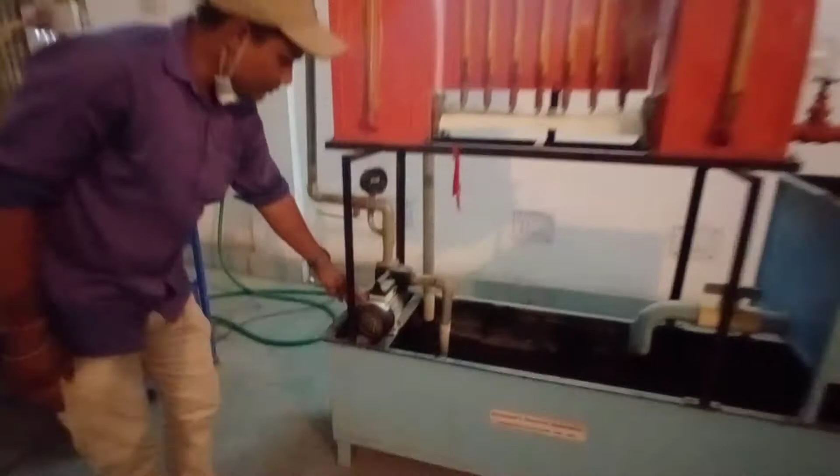This is the pump by which we pump water to the inlet tank. This is the inlet tank from which there is a scale. By looking at it we get the inlet head. There is a scale, and also a glass pipe or glass tube in which the water will be pumped, and we can get the inlet head.

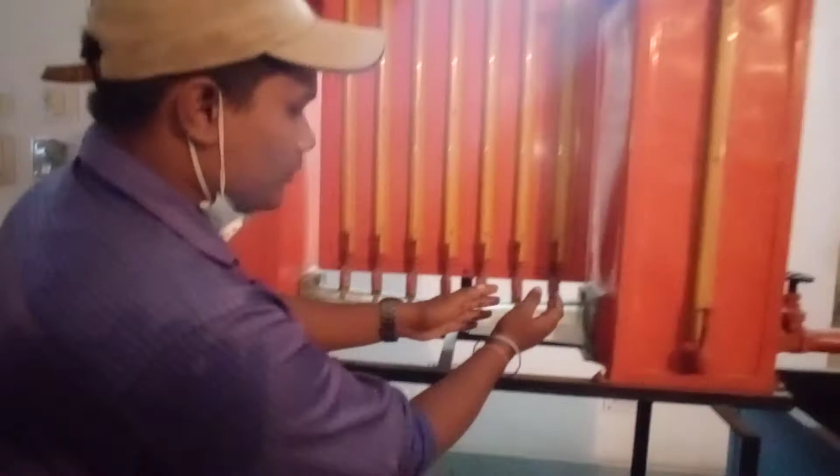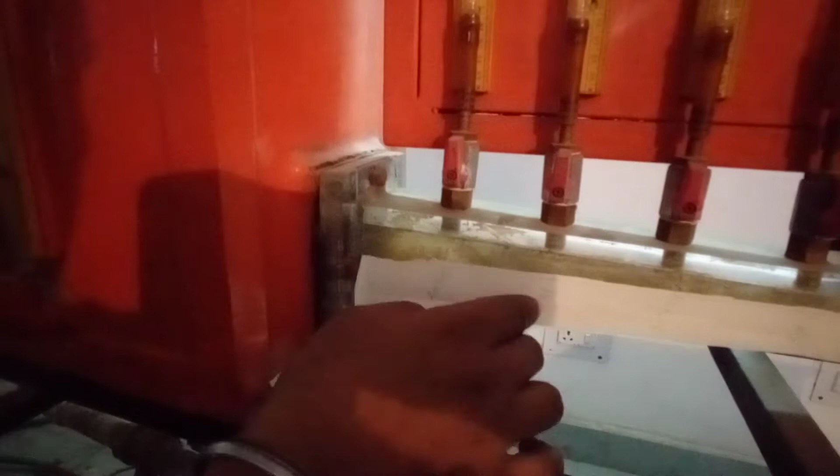After this we have discharge flow of different areas. There are 4.5 by 4.5 centimeter square area for the first glass tube, 4 by 4 centimeter square for the second, 3.5 by 3.5 for the third, and the middle one is 3 by 3 centimeter square area. Next we have the same areas again as 3.5 by 3.5, 4 by 4, 4.5 by 4.5, all in centimeter scale.

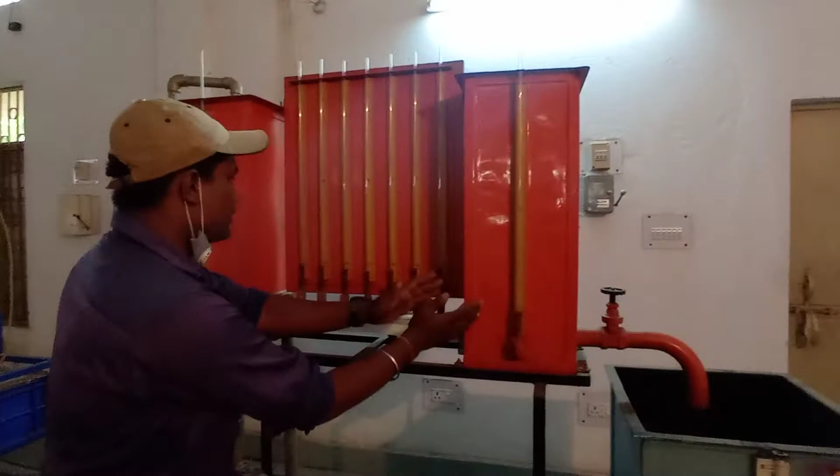After this we have the discharge tank which also has a scale by which we can get the outlet head. So this is the inlet head, this is the outlet head. In between them we have different areas so that we can get the pressure head directly from the scale, just by looking onto it.

After the outlet head we have a measuring tank. The measuring tank is used to get the actual discharge of the flow. How to get the actual discharge? There is a formula: Q equals area of the measuring tank into height raised in a given time interval.

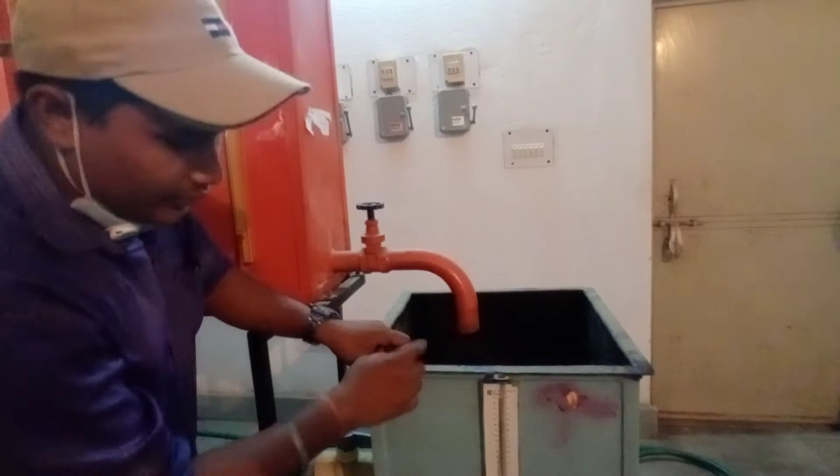So how to get the actual discharge? Q equals area of the measuring tank into height raised in a given time. So Q equals A into H by T.

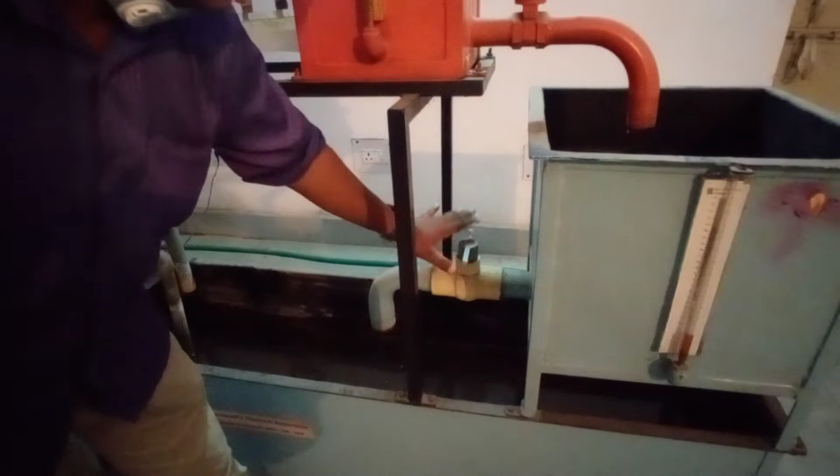Now how to control these two valves? When it is parallel to the pipe, it is open, and when it is perpendicular, it is closed. So the parallel direction of the valve represents the flow of fluid and the perpendicular direction shows it is closed. If we open the pump, we will get the flow of liquid.

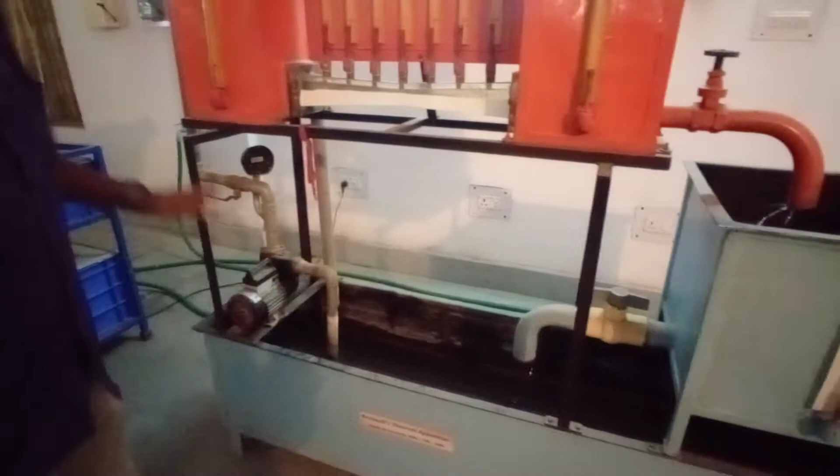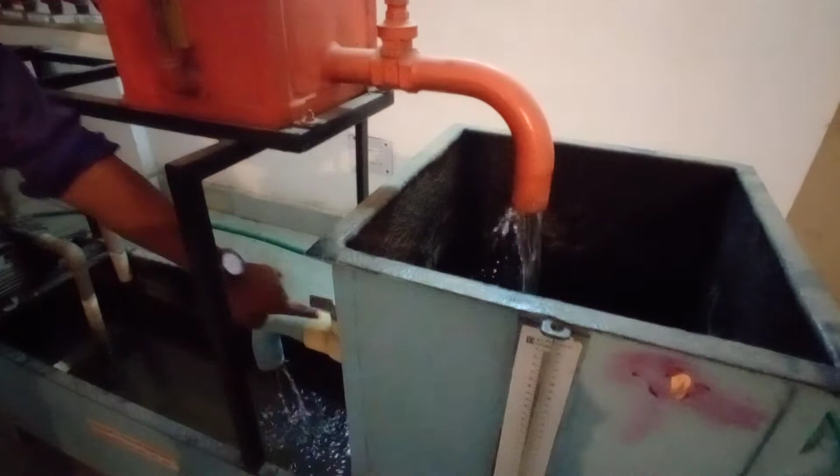Now I am going to open the switch on the pump to get the flow of fluid. Now the pump is started and we have the flow of liquid from inlet to outlet. We can see there is water coming out, and water will also be going out as the valves are open, in parallel direction, so they are in open state.

Before going on with the study, we should know how to read this tape, and at which time we are going to check the reading. We take the reading when we have a steady value, meaning the water level going up in this glass tube is fixed, not changing for an interval of at least 5 minutes.

We can see there is water going up in the glass tube. When this value becomes steady and will not change, that is when we are going to get the reading. So when it is constant, then we will take the reading.

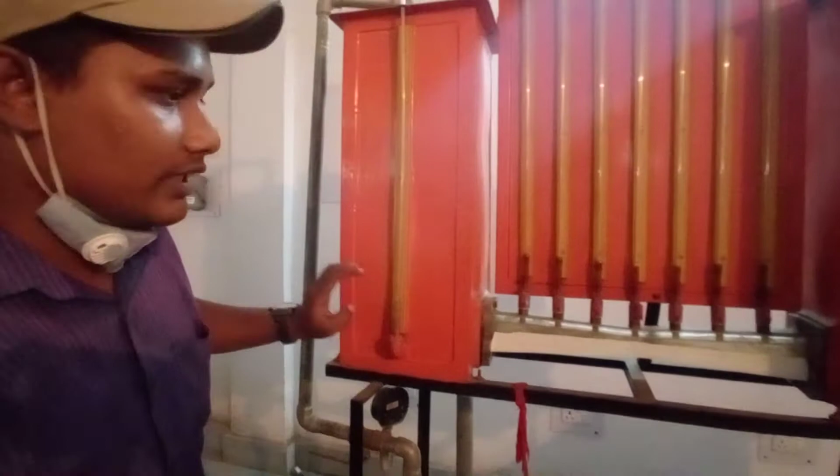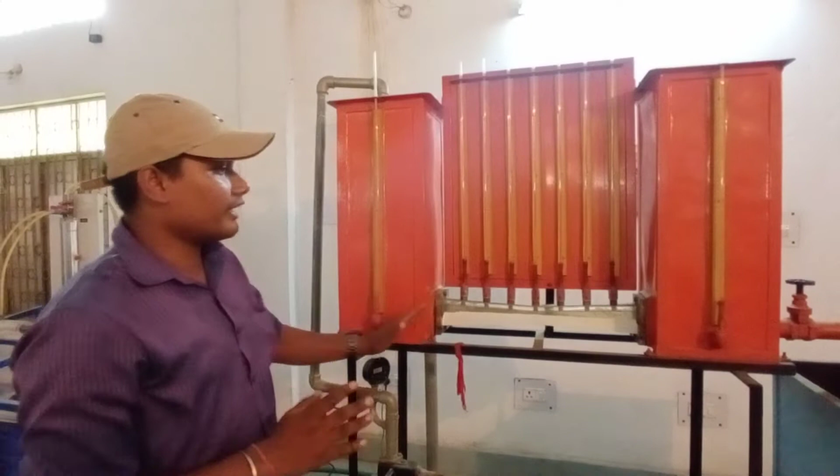After giving some time to have a steady flow rate of the fluid, we can take the readings of the inlet tank and outlet tank with the different areas, pressure head or area head. Before taking the reading, we should note we are neglecting the datum head because the height from the ground of the apparatus is assumed to be the same. So we will take only the area head, that is pressure head and velocity head.

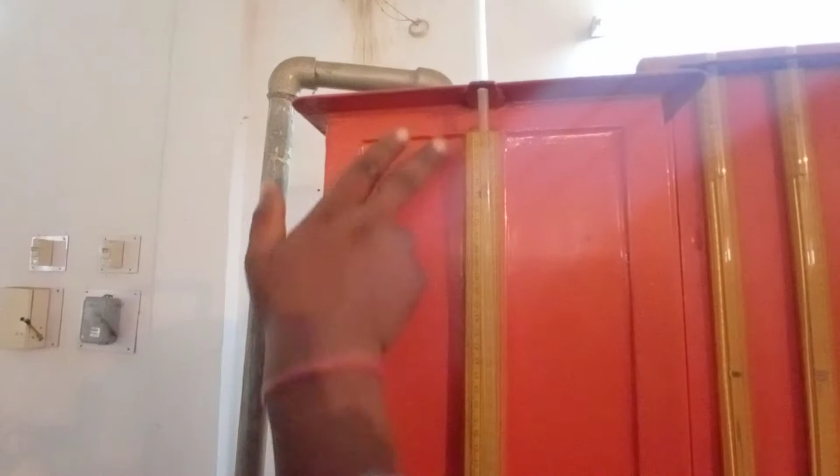So if we look at the inlet head, we can have the reading as 57.6. We can see it is ahead of 57.5 but below 58, so we take 57.6. Now this is the inlet head reading.

Now if we go to the outlet head, we can see it is 56.5, looking onto the lower meniscus, which gives the reading as 56.5. So we can compare the values of inlet and outlet, and conclude that there is a difference in height between the two tubes. Why is there a difference? Because in the flow we have losses. So how do we conclude the losses? We can look at the readings at different areas.

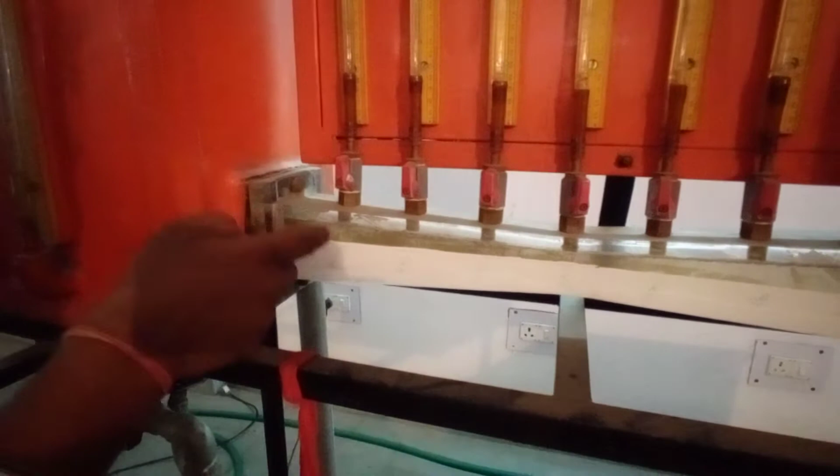So if you look at the 4.5 into 4.5 centimeter square area reading as area head or pressure head, we have 47.4. That is the reading of the 4.5 into 4.5 scale.

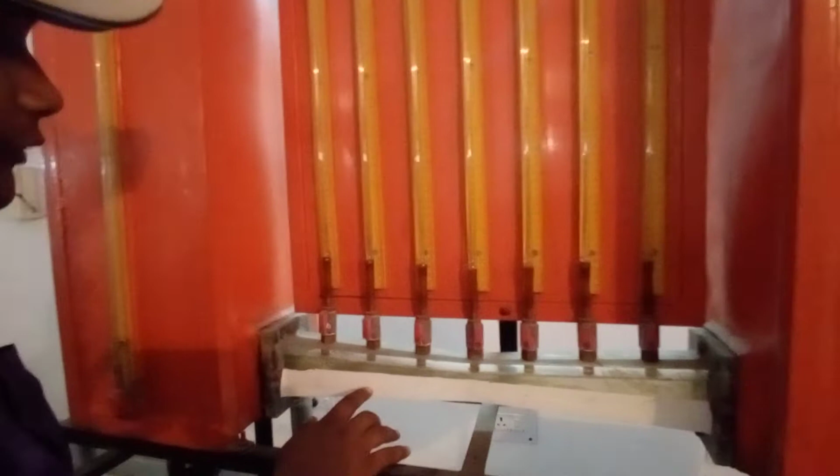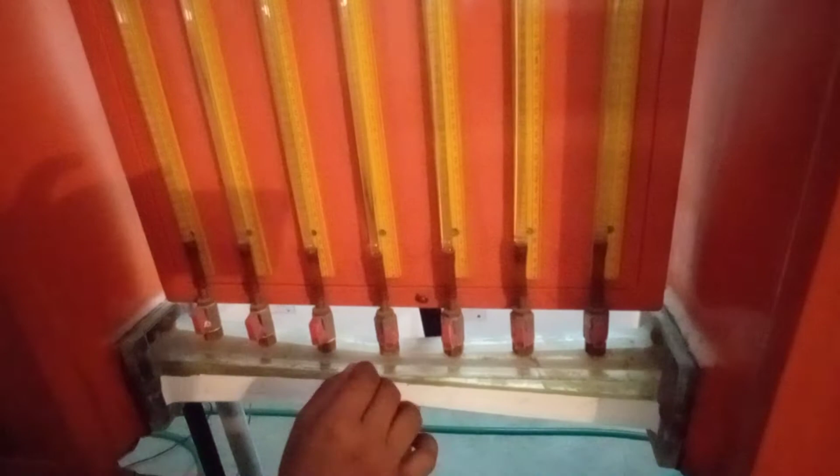Now further the central tube, that is 3 into 3 centimeter square area, we have the reading as 46.3. Again we have the 3.5 into 3.5 area, we can have the reading as 46.8.

The second last pipe, which is of area 4 into 4, is having a head of 46.9. Now further the last tube, that is 4.5 into 4.5, we have the reading as 47, which is little bit higher than the last one. So this is the area head reading.

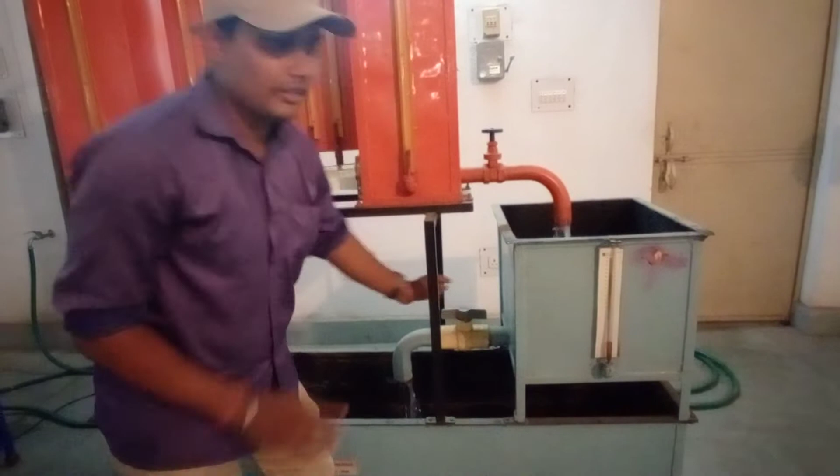Now if you are going to read the discharge, for that we have to take the height raised in a given time. So if you close this valve and put it in the perpendicular direction, we will have some height using a stopwatch within a time interval. So this is now having no height here.

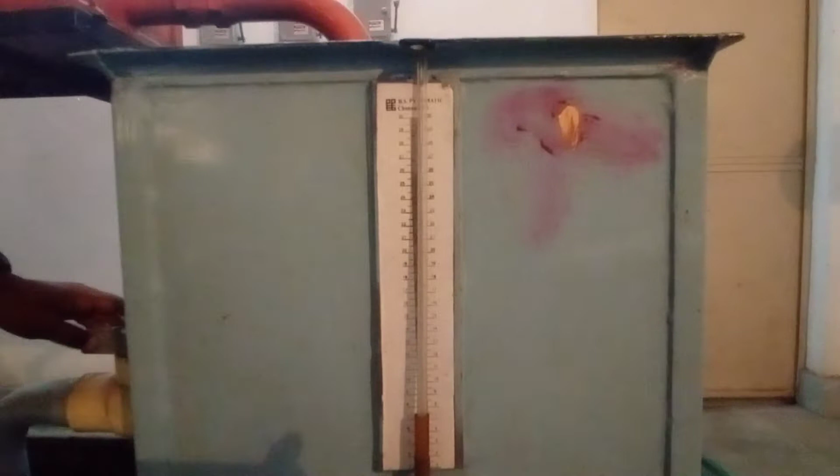If we close it, before going to that, we should have a stopwatch. So this is the stopwatch. I am closing this valve. We will have the height raised in a given time. Time has been started. We have to observe how much height it is going to raise.

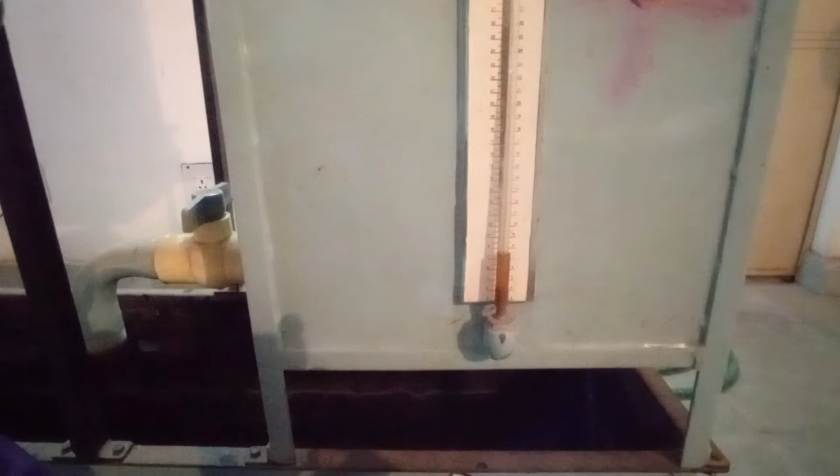Timing has been started. We will take the height raise within a time interval. We can see the time has passed 9 seconds, but still there is no rise.

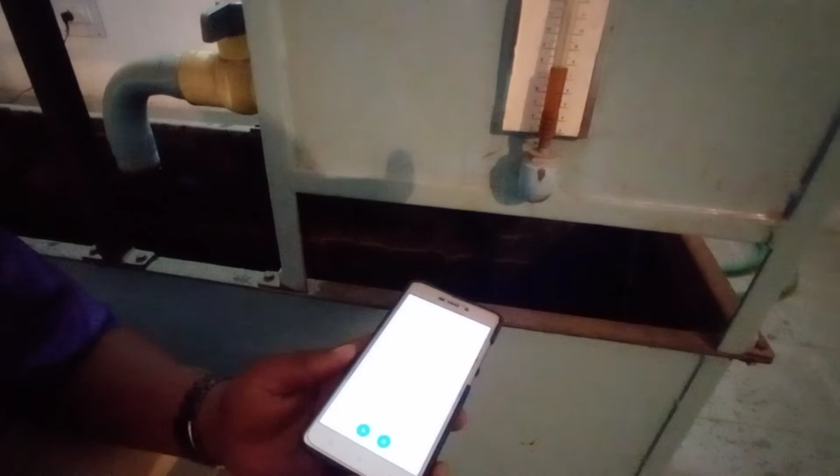Now the stopwatch has been started and we can see the height raised is 15. Now it is reading towards 16. We will take the height as 18 and the time is going to be taken. So the height raised is now 17 and the time is 34. Now 18 is the height and the time is this one.

So now we will open this. In 40 seconds, the height raised was 18 centimeters. So this is the reading, the height raised was 18 centimeters in 40 seconds.

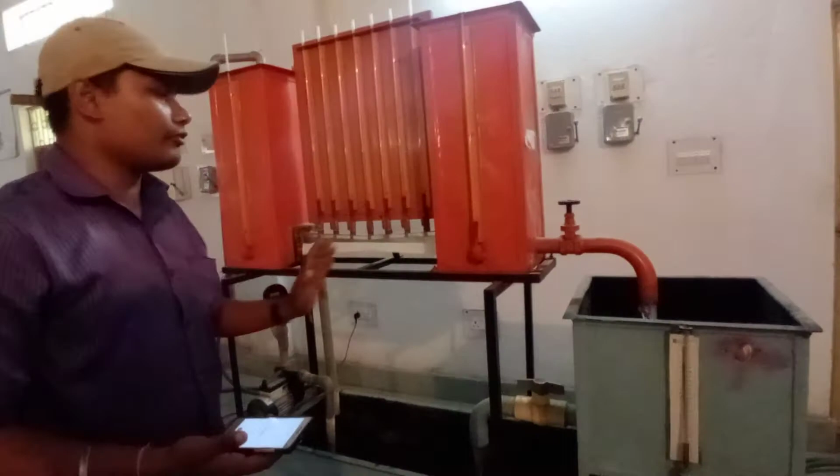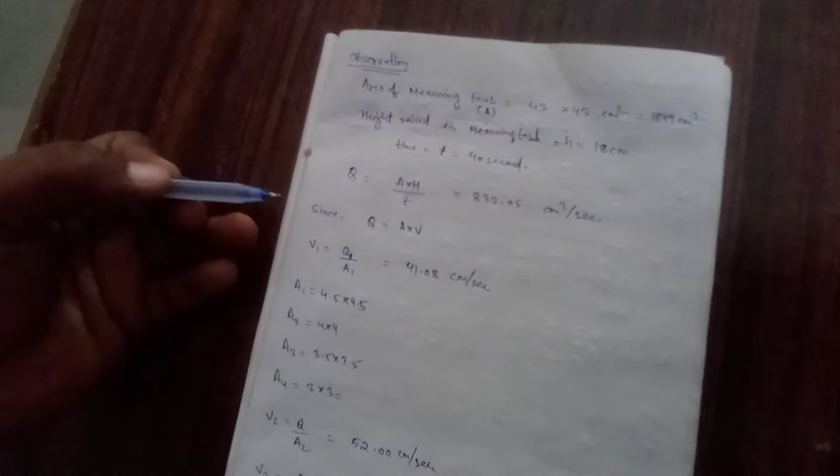Now we will use the calculation and verify the Bernoulli theorem. So now we are going to calculate the readings of the experiment that we have conducted. The area of the measuring tank was 42 into 42 centimeters.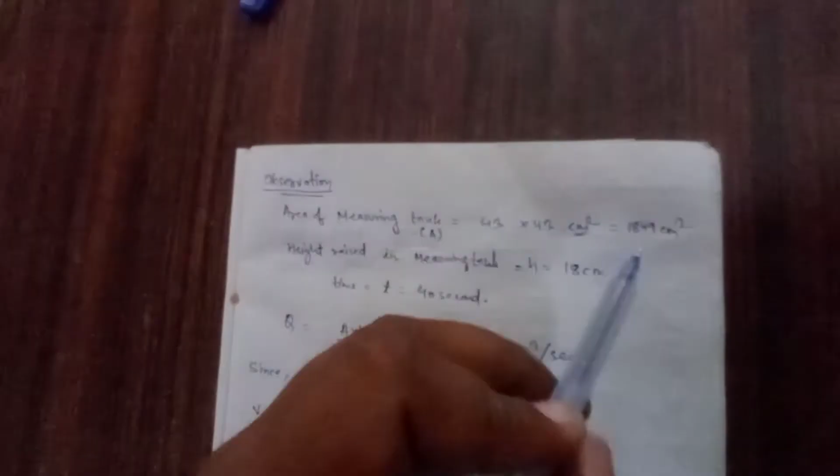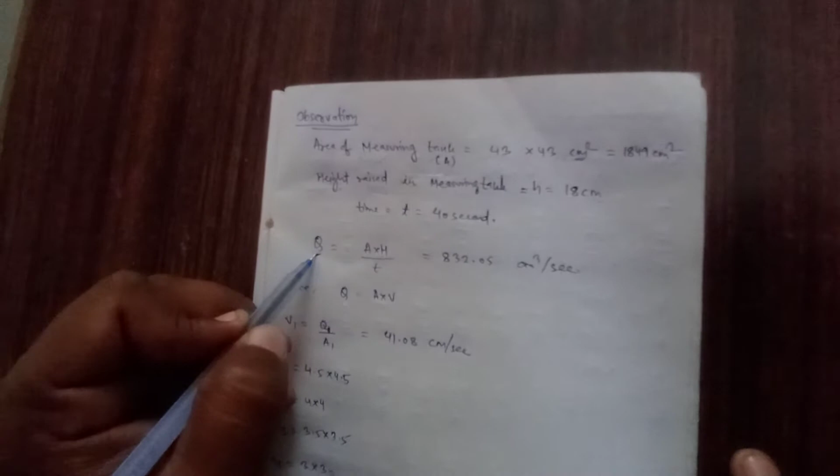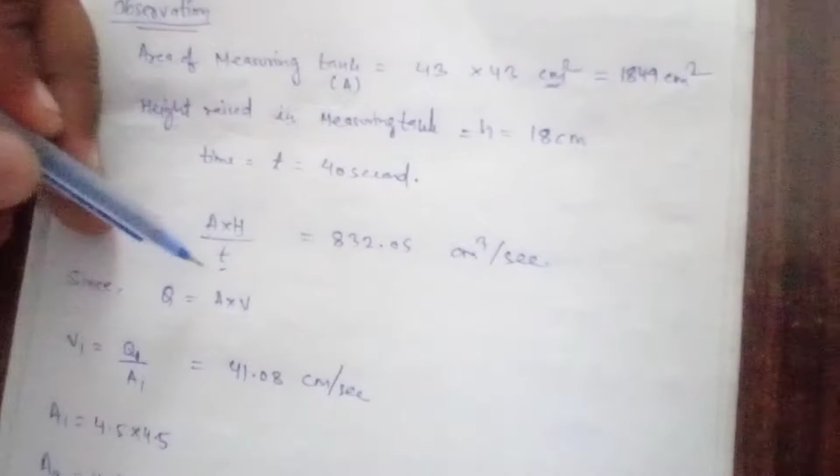So the total area is 1849 centimeter square. Height raised in the measuring tank was 18 centimeters in a time of 40 seconds. So the discharge, represented by Q, is area into height raised divided by time t. Putting the values, A equals 1849, height 18 centimeter and time 40 seconds, we will get 832.05 centimeter cube per second.

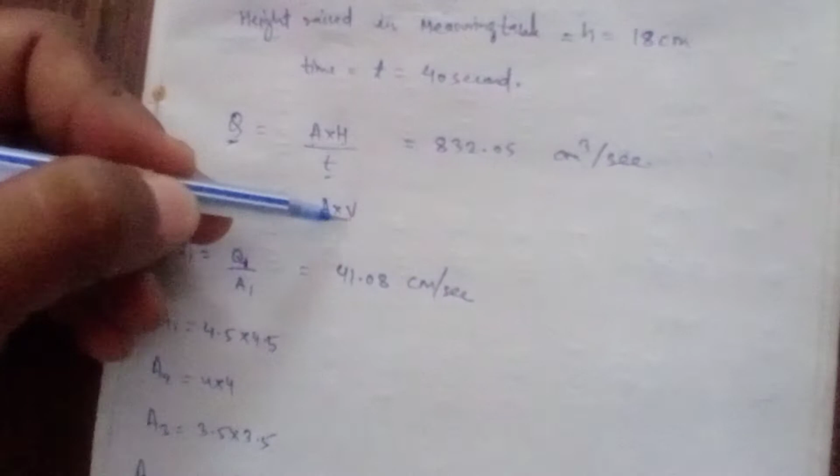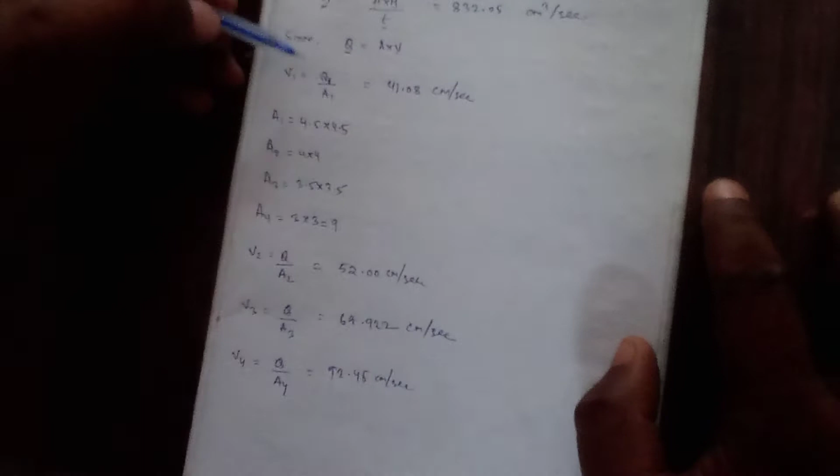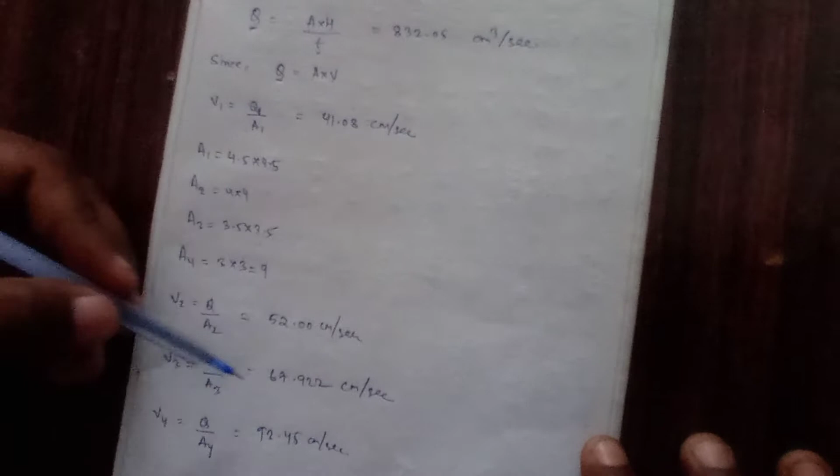Since we know discharge equals area into velocity, velocity can be calculated by dividing discharge by area. V1 equals Q by A1, where Q equals 832.05, and A1, A2, A3 and A4 are written here. Using these values, V1 is calculated as 41.08, V2 as 52.00, V3 as 67.922, and V4 as 92.45 centimeter per second. So these are the velocity data using the values.

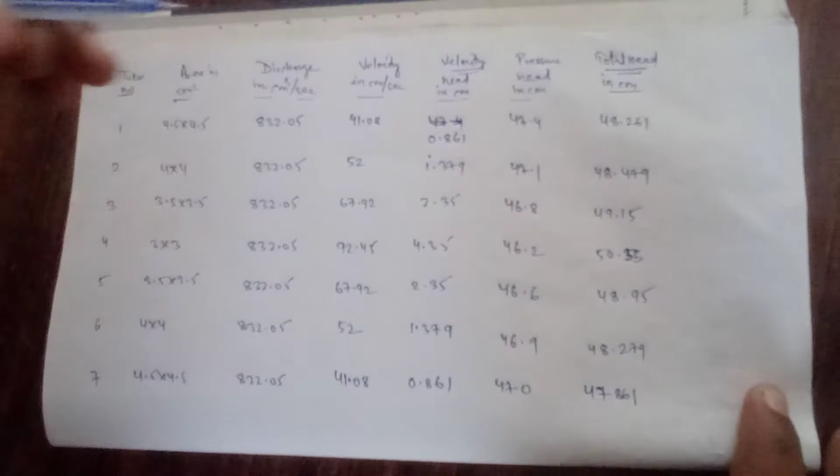Now we are going to look at the observation table that we have maintained and recorded. We have 7 different tubes, and the areas of these 7 tubes have been written in the second column in centimeter square: 4.5 into 4.5, 4 into 4, 3.5 into 3.5, 3 into 3, 3.5 into 3.5, 4 into 4, 4.5 into 4.5. The discharge is the same for all tubes, 832.05 centimeter cube per second, and the velocity that we calculated is maintained here as well.

Now velocity head is nothing but v square by 2g, calculated as v square by 2g, with g as 980 centimeter per second square. Putting that value, we get the velocity head as shown. Now the pressure head that we recorded during the experiment was written here; the first one was 47.4.

Now if we total these two values, velocity head and pressure head, we get the total head, with datum head neglected. We can have the total head as 48.261, 48.479, 49.15, 50.55, 48.95, 48.279, 47.861. These are the readings of total head.

So we can see the total head is in between 48 and 50. Only one has crossed 50; this is the reason why it crossed, and why there is very little deviation, because in the apparatus there may be some leakage or losses. We can conclude the total head is 48 point something across the readings, which verifies Bernoulli's theorem, that the total head in different areas remains the same.